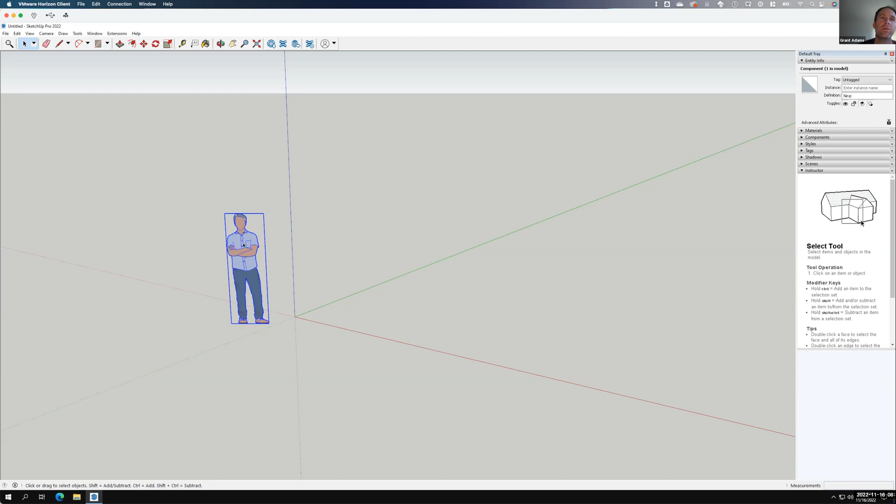SketchUp by default, when you create a brand new file, always puts a little person in for scale. This is classic SketchUp, and each version that SketchUp updates gets new people, so you can tell what version it is by who's standing there. I'm going to go ahead and erase that person because we don't need it - I did that by just right-clicking on it and then choosing erase.

Let me just reorganize here. I need to move my Zoom window over so it's not in the way of what I'm working on. There we go. And so I'd like to walk through the interface, because it's very different than any program we've used thus far.

First off, we have a traditional file menu structure at the very top, followed by a toolbar that contains some very basic tools. Some of them are hidden underneath others. So we've got our regular line tool, and underneath we have a freehand tool. We've got our rectangle tool, but underneath that we've got a few of the other tools that are available, etc.

This is not my favorite toolbar - I actually really like the large tool set. So if you go to the view menu, view and then toolbars, you can check the box for large tool set. That's the one I prefer when I'm working. It has a lot more tools on it, but it's not enabled by default, so you have to enable it, but it just somehow works a little bit easier for me. So I tend to enable that large tool set. There are duplicate tools up top here, but I'm going to go ahead and do that.

On the right side, we have what they call trays - it's kind of like our windows in the Adobe products where we have layers and whatever. They don't call layers, they call them tags, so we'll be working with tags today. There are other things we also will work with over time. We won't work too much with materials, but we will work with components, and we'll definitely work with the styles section. I'll explore a lot of those ideas as we get through the class.

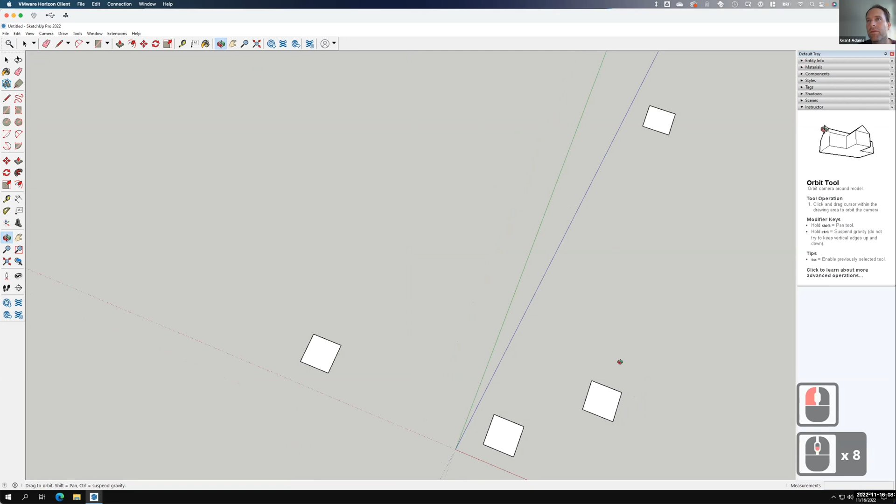If I orbit my view, I can do that by pressing the middle mouse button, the scroll wheel on my mouse, or use the orbit tool right here. If we use the orbit tool and start to look down at them, as we move through different views, we start to see that yes, they all are, in fact, squares. It's just when we're looking at them from an angle we're not seeing them all as squares. I like to point that out early in SketchUp so people aren't confused, because it definitely confuses me at the beginning of working with SketchUp since it just doesn't look quite right. That's how the SketchUp view works, though.

So when you create a shape, I'm going to pull this shape up. I'm using the push-pull tool here, we'll cover this a little bit more in a minute. When you create a shape, by default SketchUp attaches shapes together. Let me do the push-pull on this one as well, and then I'll show you.

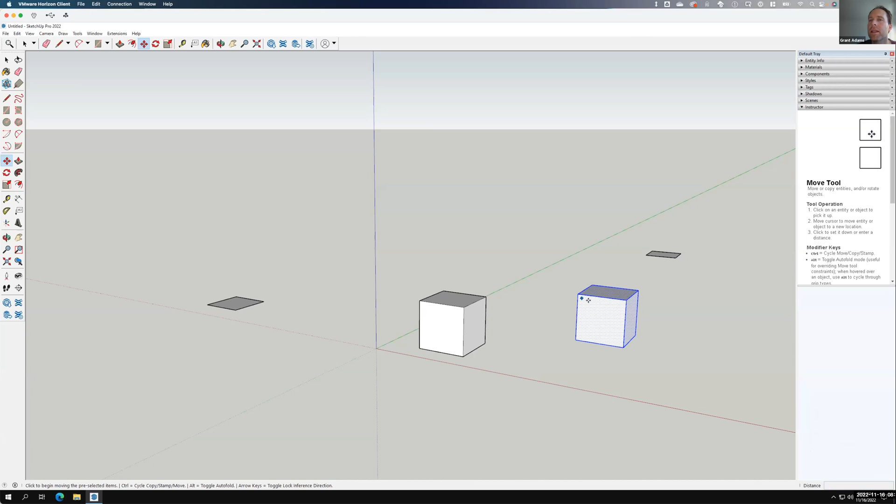This may be review for some of you, but it's worth explaining. If I take this shape here and use the move tool, and move it so these two shapes connect together, as soon as they touch they're now connected. So if I went to move them, they're now attached to each other. One of the strategies, if you don't want your shapes to be attached, is before you move them together, if you want to keep them separate, select the shape, right click on it and say make group.

Likewise, I would take this shape right here, select it, right click and say make group. And now if I take this shape and move it next to that shape, they still snap together, but if I move it again, they would stay separate. I'm a big fan in SketchUp of making groups as you create things, because if you don't, they end up being kind of attached together and get more difficult to work with. So it's part of the strategy of working in SketchUp, kind of grouping objects together.

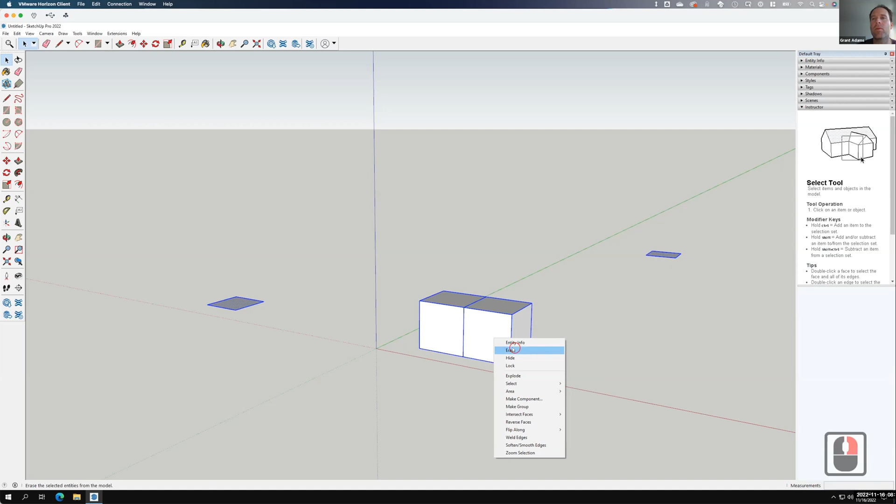So I've selected all of those. I'm going to right click and erase them. And then let's talk about bringing in our AutoCAD.

I have my AutoCAD saved from last class. I can go ahead and bring that AutoCAD in. I'll go to File and then Import, and we'll leave it set for all supported types. I'm going to look in my flash drive, or excuse me, my OneDrive for my building. So let's go here. Let me do, I'm thinking I might do this older one because it has a sloped roof, just so you can see me create the sloped roof. You know, I might not have it.

Bear with me for just a second. We'll use the base drawing here. Let me go ahead and import it.

It's going to bring in the AutoCAD drawing and give us a summary of all the things it brought in. We'll go ahead and say close, and there it is. Now this is where you start to see what garbage got brought in along with your AutoCAD.

It looks like way over here I have an extra copy of my floor plan. Not sure why it's there. Right now, if I try to select it, it comes in as a component.

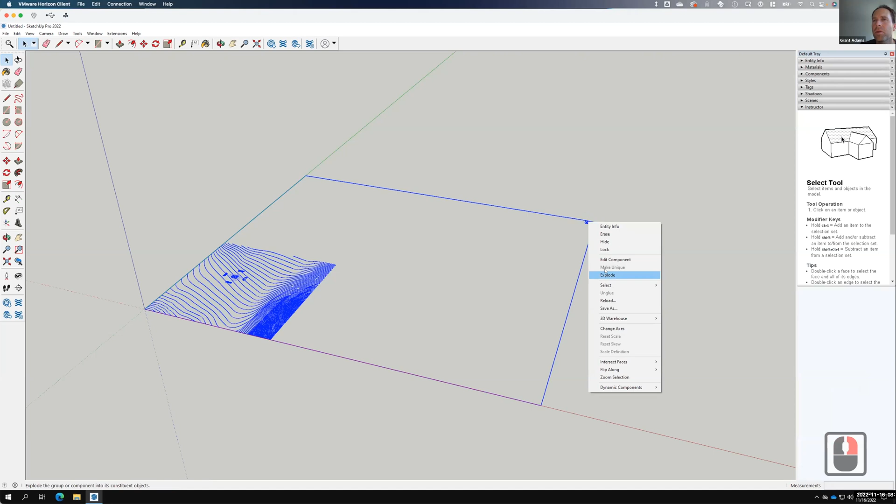I can right click on it and explode it, but that means everything will attach together. I can also click on it and then double click to get inside of it, in which case I can select individual pieces. Now that I'm inside it, I can right click and say erase, and that gets rid of that piece.

What I'm going to do to organize here is go in and start deleting things. Like I said, layers in SketchUp aren't called layers, they're called tags. I'm going to open up the tags on the right-hand side here and start cleaning up my drawing.

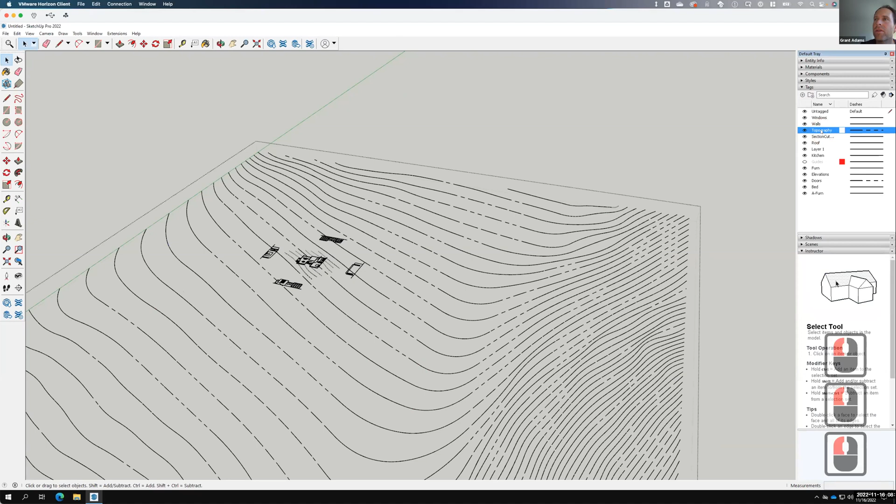First off, the topography, I don't need that. I'm going to right click on it and delete that tag. When I do that, it asks if I want to move the objects to a different layer or delete them. I want to delete them, so I'll say okay.

The idea here is that I'm trying to pare down to just the parts that I need. So as I continue on, I don't need the furniture. Let's right click on that and delete the tag, and again we'll delete all the parts of it.

There they are. Now as we zoom in and look at the floor plan a bit more, there's a lot of things in this floor plan that I just don't need, that I can end up bringing in or deleting a little later on. We can see what's on a various layer by turning those layers on and off.

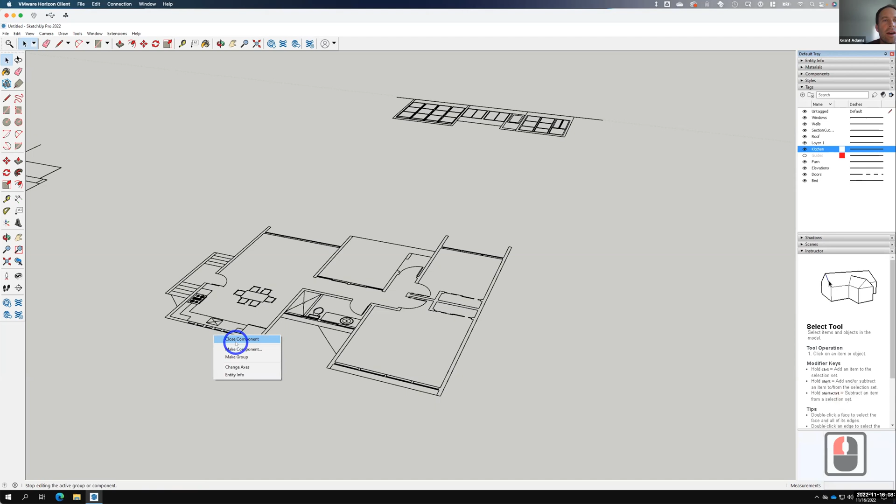This one's a little complicated because on this kitchen layer, I have my windows - they weren't layered correctly - but I also have parts of my kitchen. So I might have to go in and manually delete some parts of this.

So let's go ahead and do that. I'll select them, right click and erase. I could also press the delete key on the keyboard. Now I remember, if you're on a Mac, the delete key won't work via the remote desktop.

Go ahead and just right click to erase on all of these. And now everything that's left is just those windows.

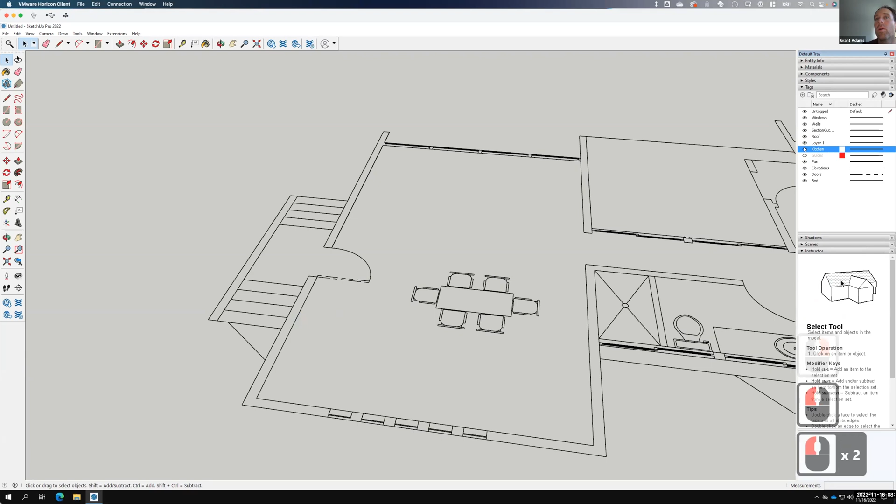I want those to stay. So when I right click to delete this, this is where I'm going to assign it to another tag, and I'll assign it to the walls layer like that. We'll go ahead and say okay. So it got deleted, but now it's on the walls layer.

What I don't need is the roof lines here. I don't need that, so let's go ahead and delete that. We're going to delete the entities.

I'm not even sure what this section cut is. Let's zoom out and make sure that it's not something that I need. Nope, not something that I need. I'm going to right click and delete that tag.

So the cleaner I make this, the better off it's going to be long term. There appears to be nothing on layer 1, so let's go ahead and delete that tag.

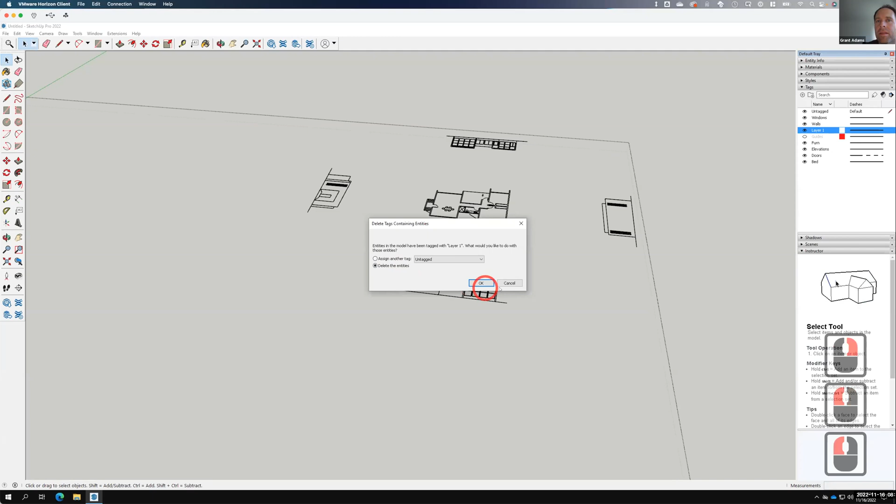Now my windows, that one's kind of an iffy one because I need some parts of the windows. If the frames of the windows are still there, I think we're okay. So I'm going to go ahead and delete the windows - right click and delete the tag.

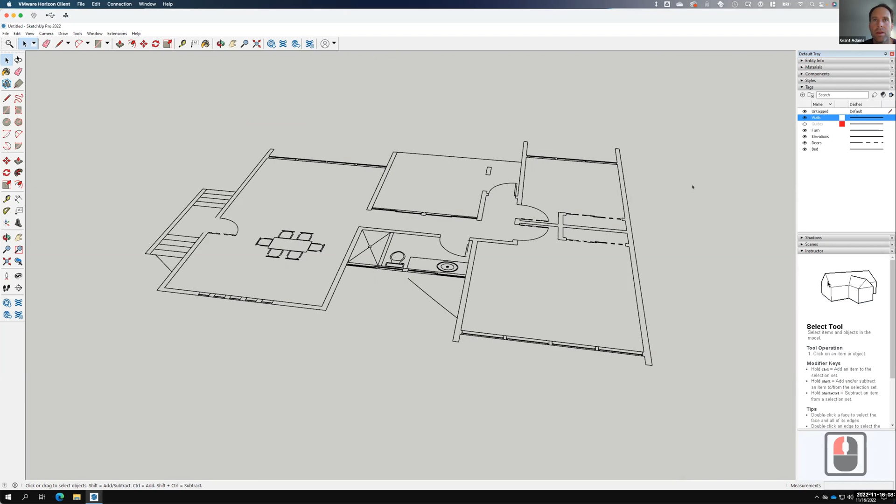Now you don't have to delete them all, but a lot of times... oops, I don't think I deleted them. Let's undo. Ah, there it is, okay. Right click, delete tag - sorry, we need to delete. There we go, and now those have gone away.

You can leave all of these, but they tend to get in the way as you start to build your model. So the more you pare it down, the better off you're going to be, I think.

So we're going to leave the walls, obviously. The guides here, we don't need them - right click and delete that. The furniture, we don't need that - right click, delete tag. Elevations, I'm going to need. Doors, I do not need, so I'll right click and delete that.

How did you select some of the kitchen when you were selecting individually? Okay, so that's fine. If you're outside of the component, when you go to select it, it's going to select the whole thing. If you double click on it, that'll let you get in.

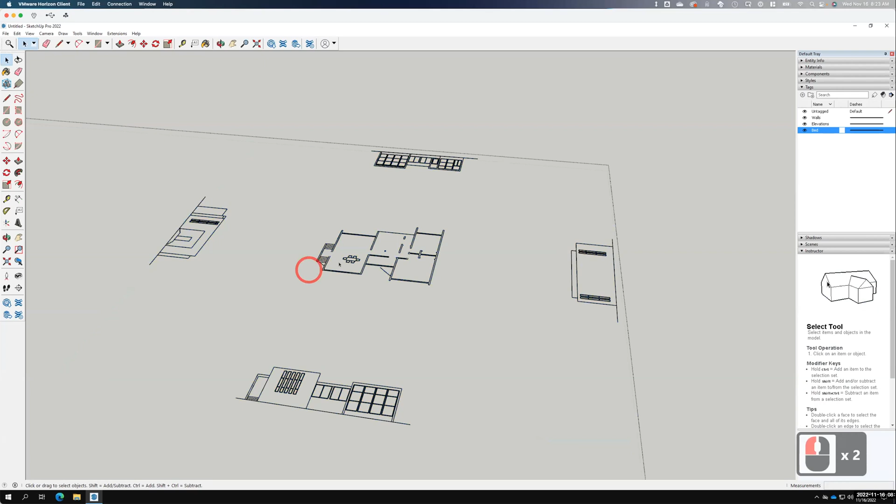For example, I don't want this table here. So now that I'm inside the component, I can just select it and delete it. I'll right click and say erase. And you can see that I'm actually missing a few other little bits of lines as I was starting to clean this up.

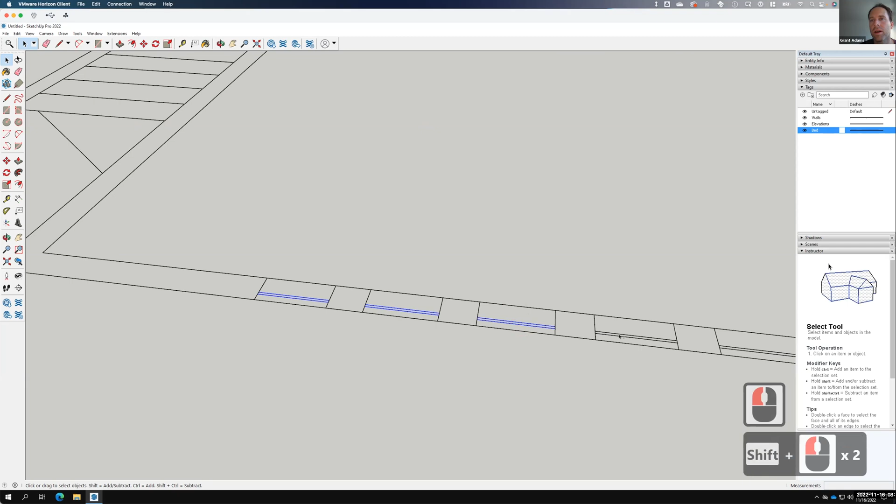Furthermore, I don't need these double lines for these windows, so we'll go ahead and select those and delete those. A lot of times it's easier to work with layers and delete by layer, but other times you just need to go in and manually delete some things, like that little extra line that was obviously on an incorrect layer, so we'll go in and select it.

Selecting, by the way, works the same way as AutoCAD. Selection from left to right is only what's fully contained. From right to left is everything that's inside, everything that it touches. So the selections are similar in that case.

The bed layer here, we don't need that. And so we have the elevations. We have something called untagged. It won't let me delete it because I need a new tag. I'm going to create a new tag, so I clicked on that little plus sign and I'm going to call this 3D.

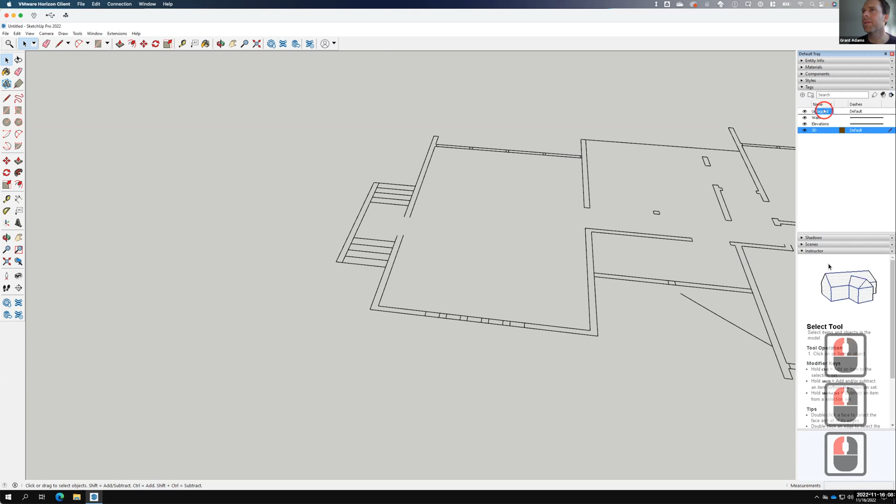And then I can right click and delete this one. Oh, let me make this one current. Sorry, now I'll be able to delete it. No... well, it doesn't appear that I'm going to be able to delete that.

Okay, that's all right. So what I end up with is the elevation views and the walls. At this point, oh, looks like I do need to get rid of that line there.

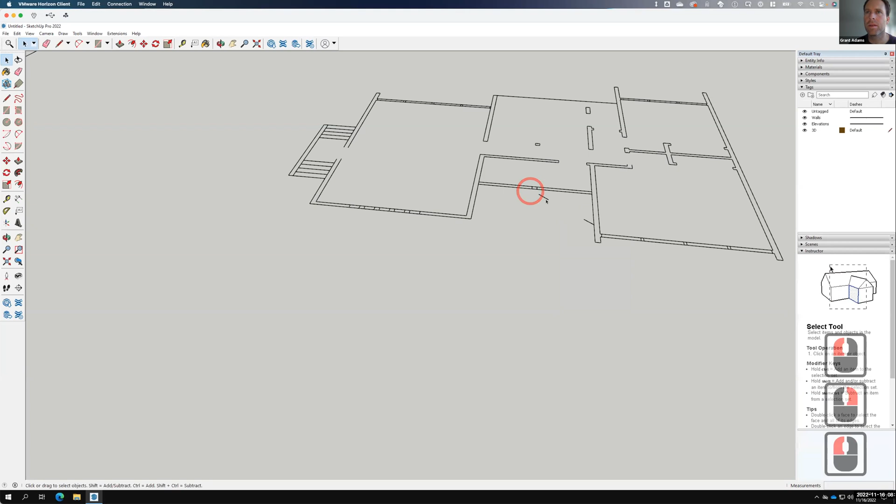Perfect. Okay, so now at this point, I can get out of the component, but I'm going to go ahead and break this component up so that I can make individual groups of each one of these pieces. So I'm going to right click on the whole thing and go to explode, and when I do that, it breaks these all into just regular lines.

But what I can do is select each one of the elevation views, right click and say either make component or make group. I tend to choose a group, but if you'd prefer to make a component, you can. Components are slightly different than groups in how they're treated, but for our purposes right now, it makes no difference which one you choose.

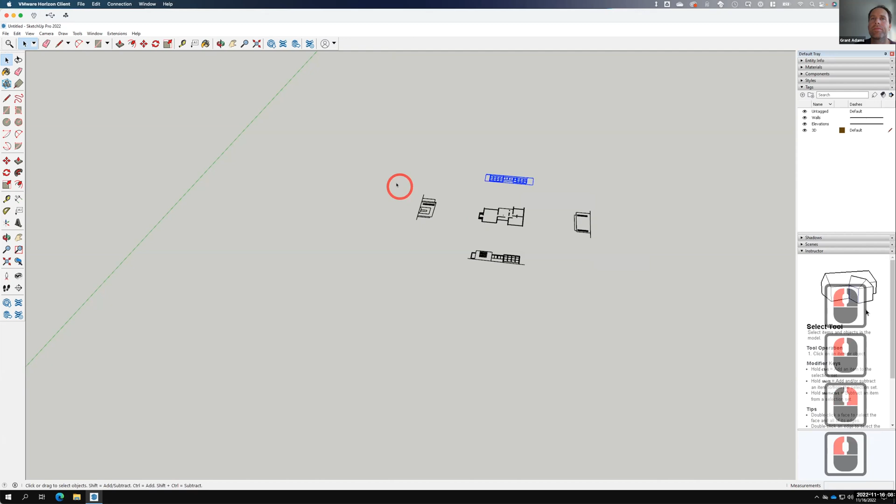I'm going to go ahead and stick with a group. I'll right click on this one and say make group. I'll right click on this one and say make group. Just like I was talking about earlier in lecture, by making these groups, I'm causing these not to attach to anything else, so they're all separate objects.

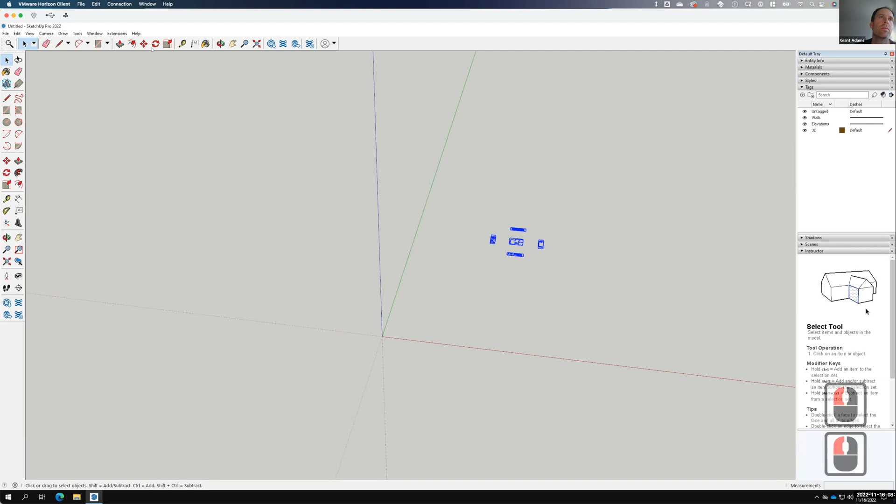Let's go ahead and move those closer to the axes over here. I'm going to go ahead and with them all selected, I'll use the move tool, and I'll go ahead and move these closer to the axes like that.

All right, so now that I have all of those pieces, let's think about how they are lining up. First off, I can take these elevation views and actually stand them up and use them as kind of references for my building. So how would I go about standing them up?

Well, there is a rotate tool in SketchUp right here, but it's very difficult to rotate without a three-dimensional object to rotate off of. So what I actually recommend doing is creating a little box right at the floor line. So my floor is right here. I'll create a little box like that, and use the push-pull tool here to bring it up in 3D.

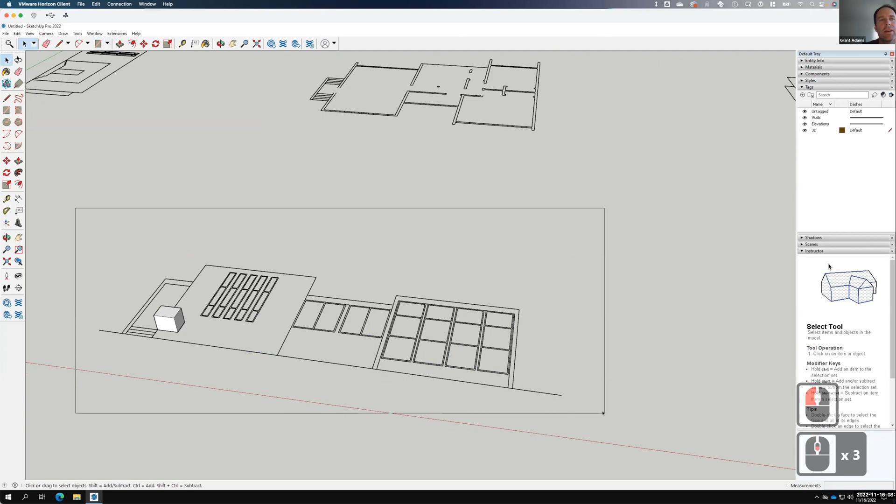Now, the dimensions of this don't matter, but once I have that box on my view, I can use it by selecting it and my elevation view with the rotate tool to rotate in that plane. So rather than just rotating around in the flat plane, as I move to this face, I can get the rotation tool to turn out to be the red protractor right there. And of course, it doesn't want to do it the way I want it to.

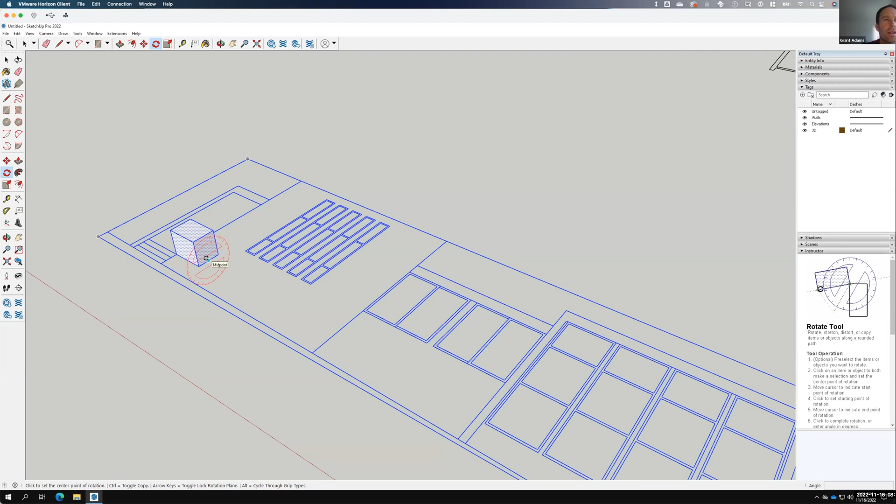Try it, sometimes you just have to fuss with it a little bit. We'll go ahead and do it from the midpoint here instead, so I'll click, and this is the point around which I want to rotate, and I can fold that point straight up. Now we know that I was a little bit low when I did that because I moved it from the midpoint, so I will move it vertically.

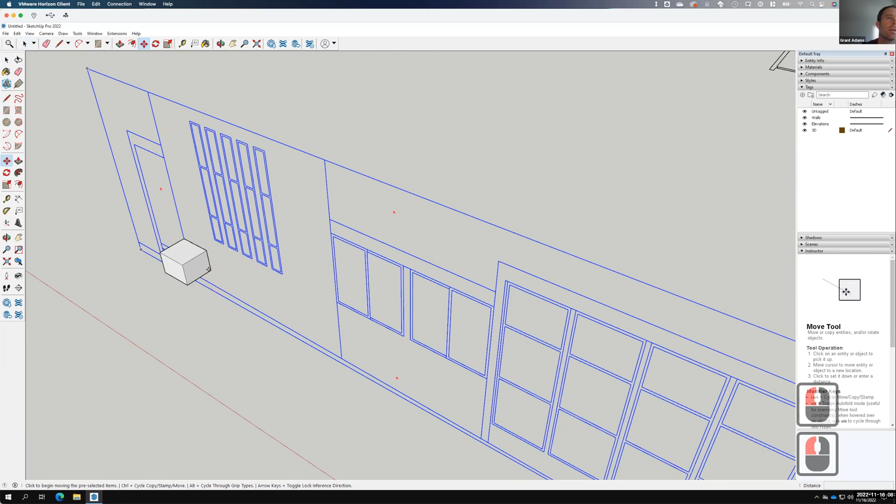Now, the elevation, not my little box, and we will go ahead and move just the elevation from there up to the midpoint there. The only reason I care is because I want my floor plan right here to match up. If I came straight across, you can see that the line turns green when I do that, it should be green and it should come over and meet that point there, which is my finished floor height. So I just want to confirm that's doing what it's supposed to at the correct height.

Once that's done, I can go ahead and erase this little box, and I can also erase this line that kind of ties it together. There it is. So let's do the same thing over here with this view.

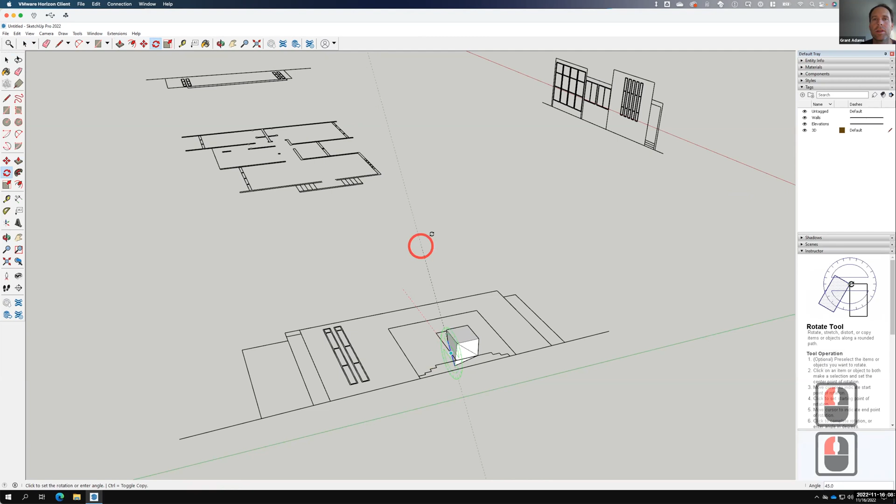So once again, I'll create a box, and then I'll use the push-pull tool to make it three-dimensional. Then I'll use my rotate tool. Right there, and we're going to rotate this up. Oops, helps if I select it first. Sorry, there we go. Now we use my rotate tool.

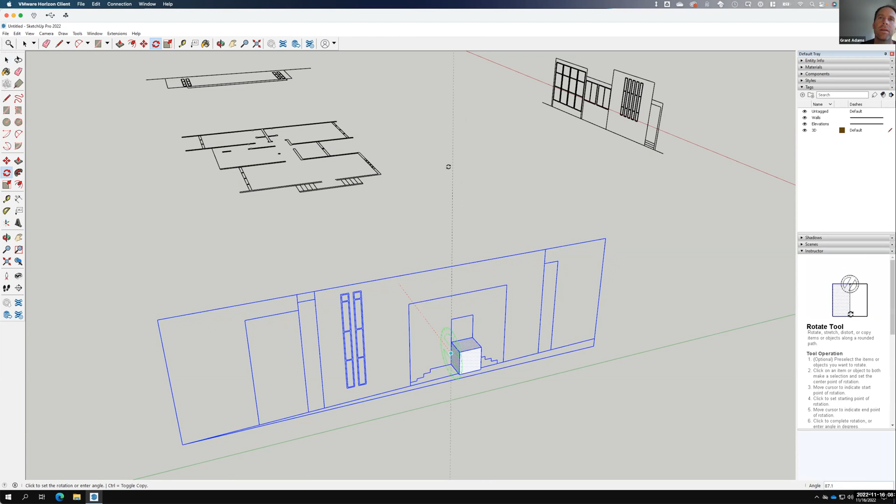And we're going to rotate that so that it's up. And you can actually see it kind of snap, it'll snap to a blue line right there, and that way it's standing up correctly.

Now, likewise, I have to make sure that this lines up. So if I came from my floor plan over here across as red, that's where it's supposed to be, and it's currently too low. So I could go ahead and move. Oops, they're attached, sorry, I need to move just this piece. We'll go to move, and there it is. That's lined up. Then we'll continue.

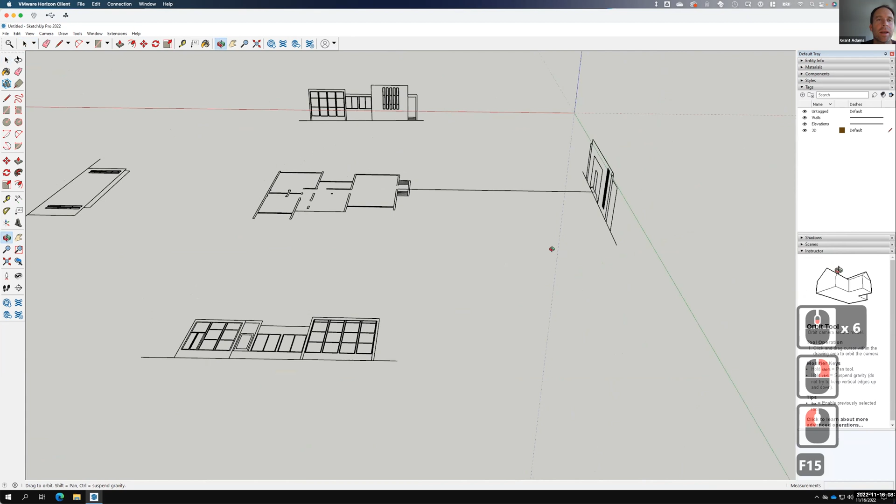I can go ahead and erase that box, and we'll orbit. Oops, sorry, I'm going to do that several times. Rhino is right click to orbit, and I get lost and forget that I'm in SketchUp, not Rhino.

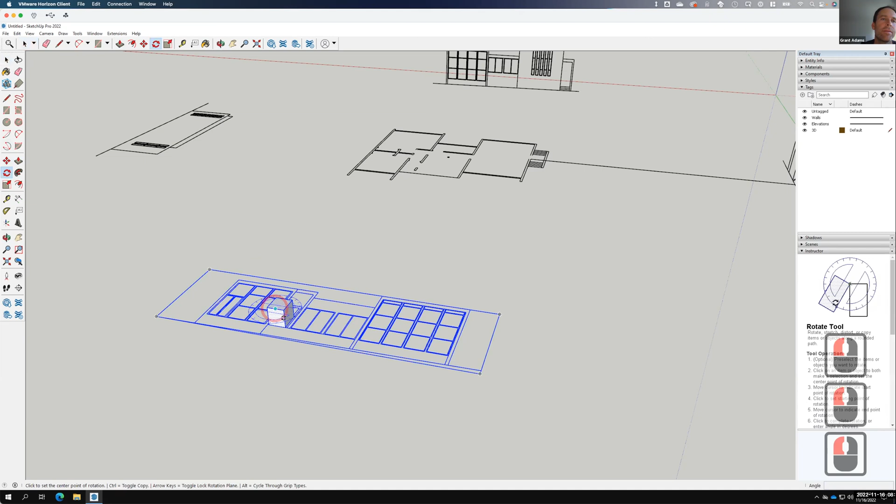All right, and then we'll do another one here, and I'll again use the push-pull tool to make it a little bit more three-dimensional. And then we'll select all of it, and we'll go ahead and rotate again until it's standing up.

We need to confirm that it's at the correct height, so we'll go from right here, come over right along the green axis. There it is, and that is a little bit high, so I'm going to take this and we're going to move it down. Like that. Then we can delete that box.

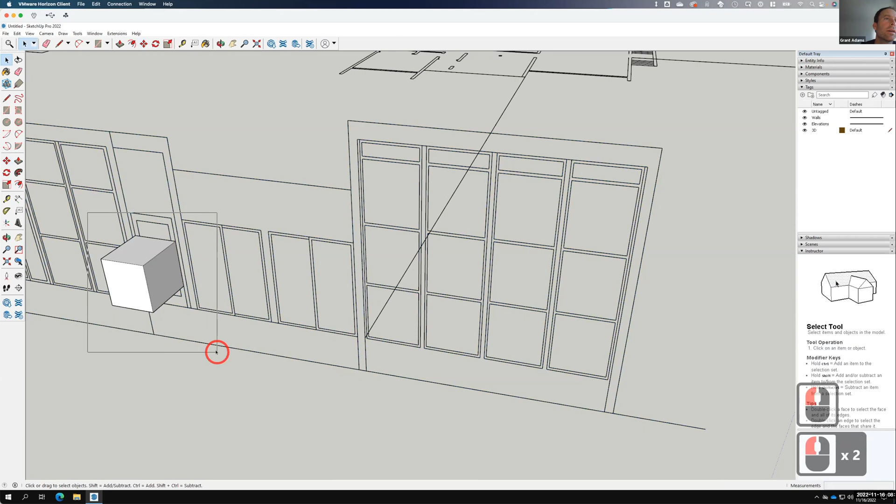We don't need it, right click and erase. We don't need that line either, we actually don't need this line either. And I'll orbit, and you can see where I'm going with this. We'll have one more to do here.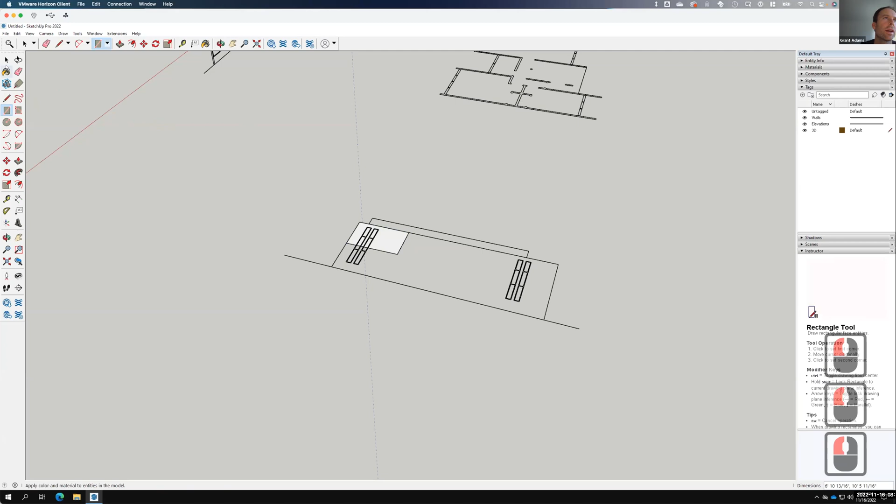This one I have no way of judging where it is, so I'm just creating a quick box, and we'll then move it after the fact. So let's go like that, take the whole thing, and rotate it. There it is.

And this one is really hard to judge where the height is because I have no real base on where the floor is. So what I'm going to do is I'll pull the height over from here along that red axis, like that. And then I can take this whole thing and move it.

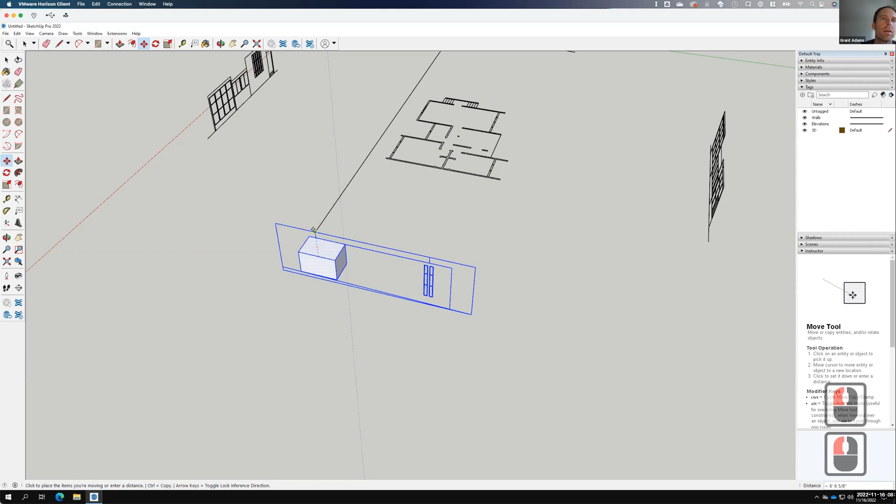I didn't quite get it all, let's go to move, and we'll go from that corner till we meet it there. And so now that I've done this, I have all of my views set up, and these are going to help me build out my 3D model.

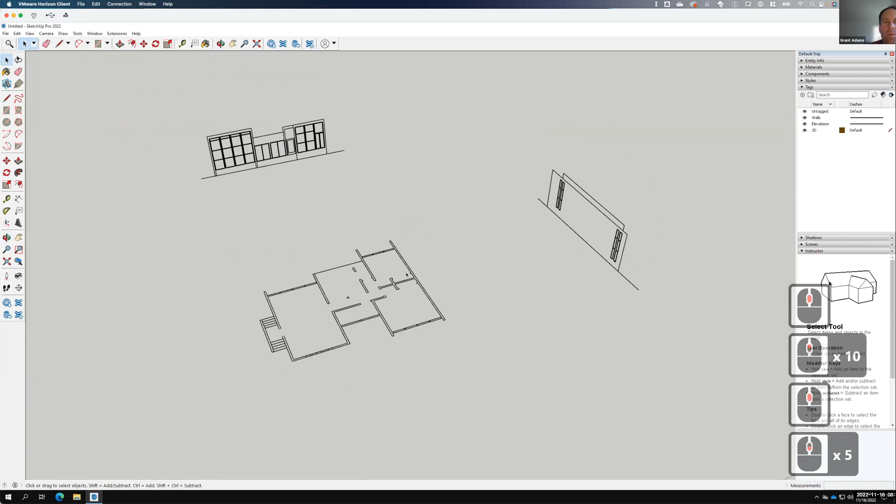Okay, so first thing I need to do is start thinking about the floor plans. So we'll come in here and I have a couple options. First thing I can do is I can go ahead with a rectangle and just draw a big rectangle that essentially covers my whole building. So we want it to be big enough to cover the whole building.

There it is. And what some people do is they'll go ahead and at this point explode the floor plan that they created, and this should divide up that rectangle. If it does, that's great, and it saves you a bunch of steps. If it doesn't, you may be stuck tracing over your building using the line tool.

I'm going to go ahead and try the explode technique. So at this point, I'll select my floor plan, right click and say explode, and we'll see if it's done it. Okay, it did do some of it.

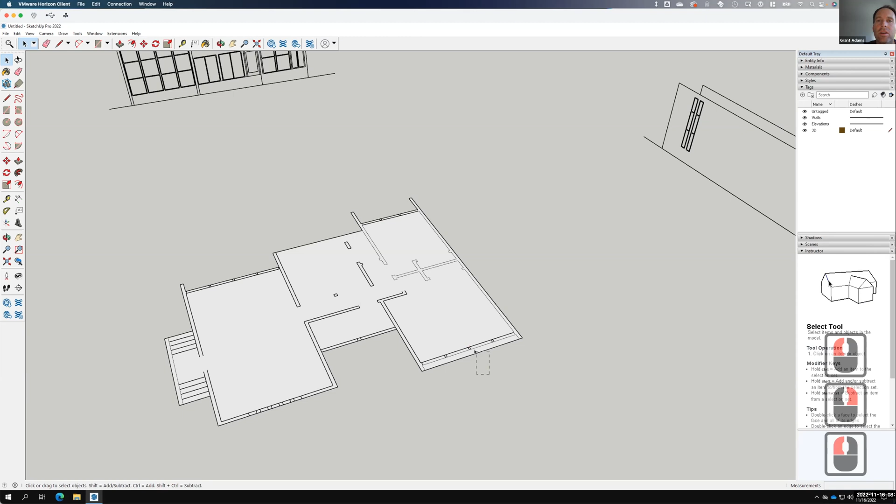At this point, I could delete the parts that I don't want. Outside here, we don't need that piece, so I can right click and erase. We can get rid of these two lines, right click and erase. I can get rid of that section, right click and erase, and get rid of this section. I can right click and erase, and get rid of that section right there. I'll right click and erase there.

So in here, it has divided up a lot of the walls, but here, for example, it hasn't divided because I don't have a line that goes across. So I'll have to come back with my line tool and draw a line that goes across, and that separates

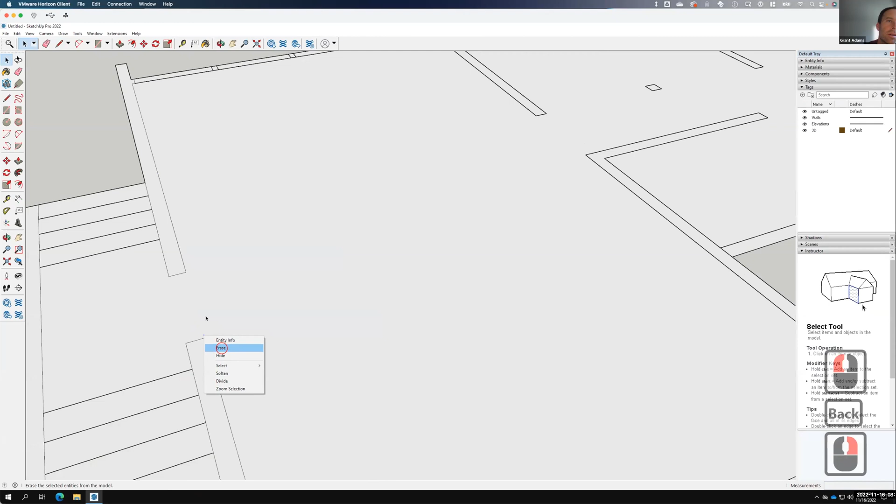some of these shapes. So let's see, that's now separate. That line is a little bit extra. Let's go ahead and delete that piece like that. This is separate.

Looks like it did trace some of it. It looks like I have to close that one off, so we'll come over here and close this one off. And that then separated that from this.

That's not quite separate, and this is just one of those you have to work your way through. You may have to come in and do some extra tracing. So let me trace over that section, let me trace over this, I'll trace over this. All right, we'll trace over that section right there.

So, like I said, this is just part of SketchUp. Sometimes you have to do a little bit of extra tracing like that. Sometimes you could use the rectangle tool and just draw right over the top. Sometimes that'll work. And we'll keep working our way through.

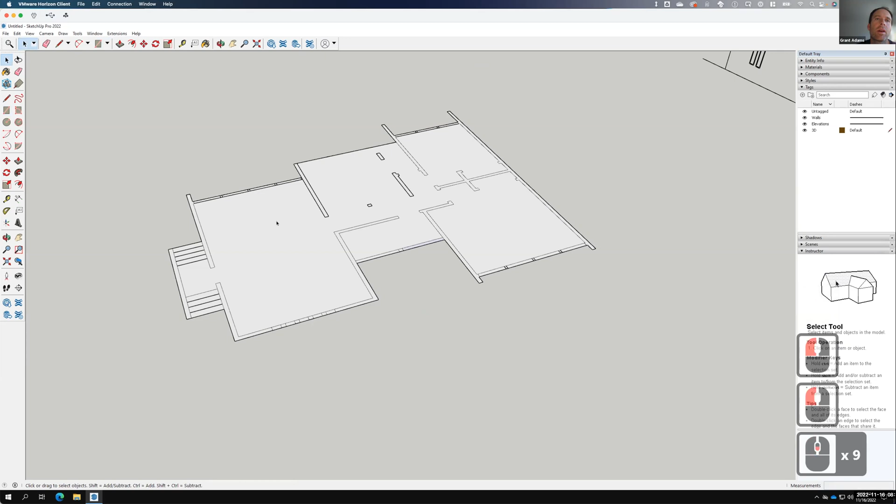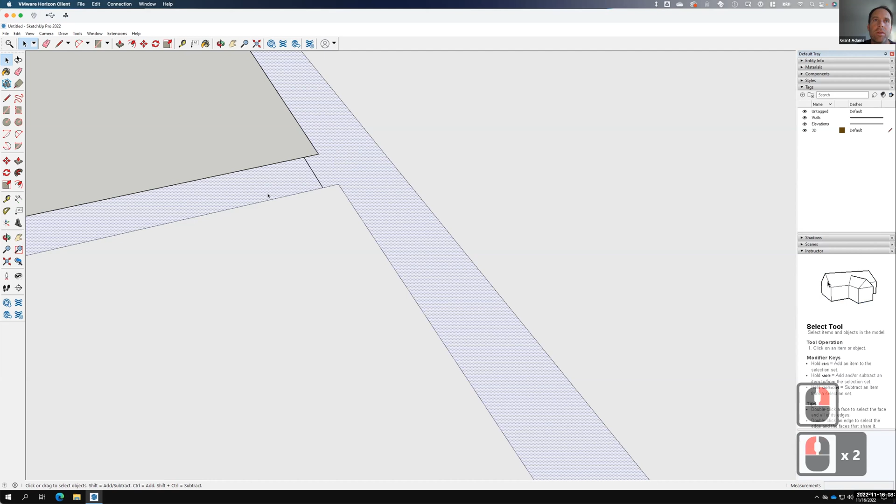Looks like this one hasn't quite been separated out yet, so let's trace it. And sometimes that's all it takes. The way SketchUp works is that this surface is separate from that surface because of that line. So if I were to delete this line segment right here,

this surface is now continuous with that surface. I still need to add these lines. Now that one's separate, that one's separate. And let me confirm those are all separate. That one's not yet. There we go. A few more in here - we've got this little post.

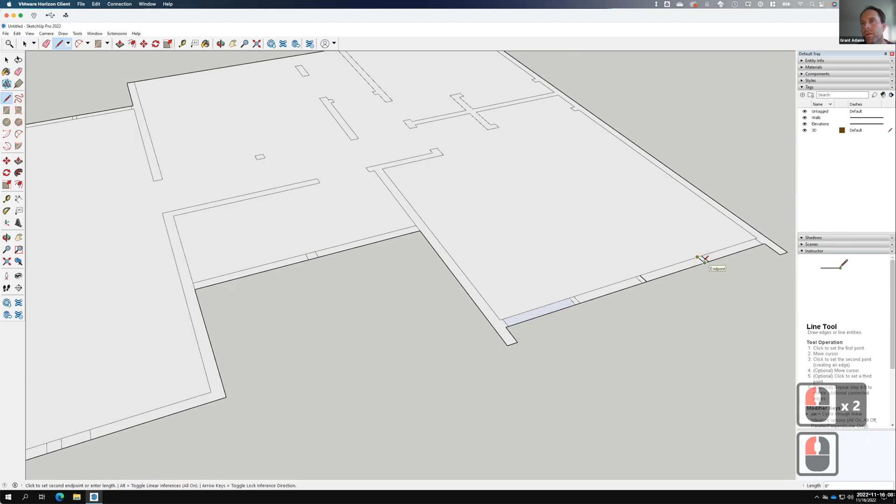Sometimes all it takes is retracing one line to get them to separate out. This looks pretty good so far. That section still needs a little bit of attention. And we can confirm, yes, those are all little separate pieces. A little bit more attention up here. I think that probably did it.

Perfect. So now that I have all of those separate, I can start to use that push-pull tool we talked about earlier to build up these walls. We can see over here that this building has a height equivalent to that. So if I use the push-pull tool on, say, this little wall, I can pull it up till it matches up with that height right there. Likewise, I can take this wall here and pull it up till it matches that height. So I'm using this as a reference.

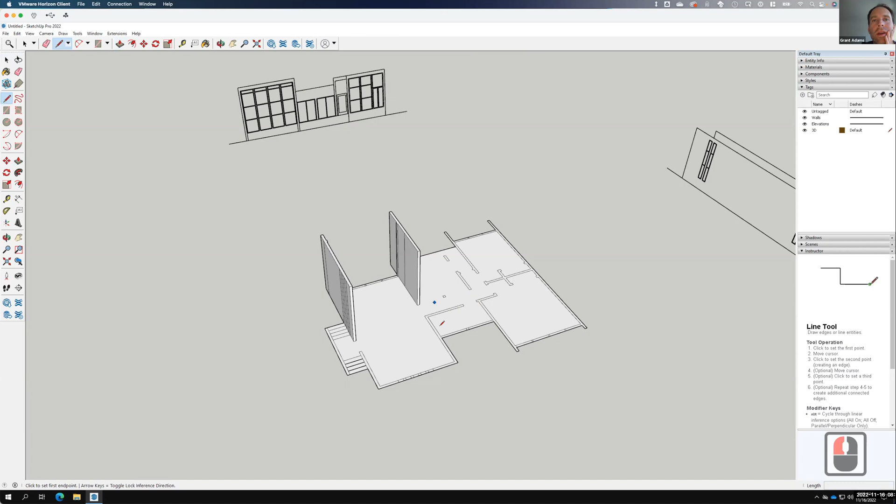Also, this piece of the wall is shorter, therefore I should separate those two. So I'll draw a line that goes across right there so that I can pull this separate from that piece there.

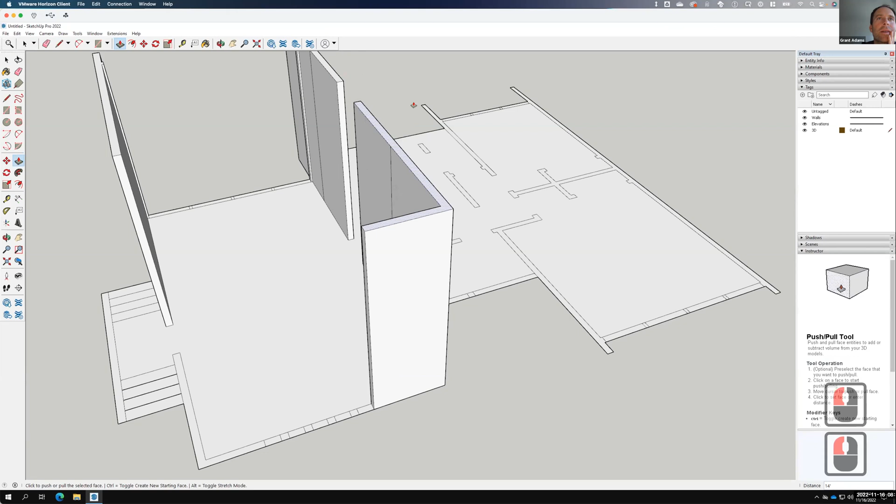So we'll go ahead and use the push-pull tool and pull this one up. And again, we're just snapping to our other pieces. We can use the push-pull, and there we go, pull this one up to right there. And then obviously these are all little windows.

So we'll take these surfaces. I'm going to hold down Shift and select all of them at once, and we'll use the push-pull. Nope, it's not going to let me do it all at once. Sometimes SketchUp has these kinds of little quirks, so I'll have to do them all separate, like that, like that.

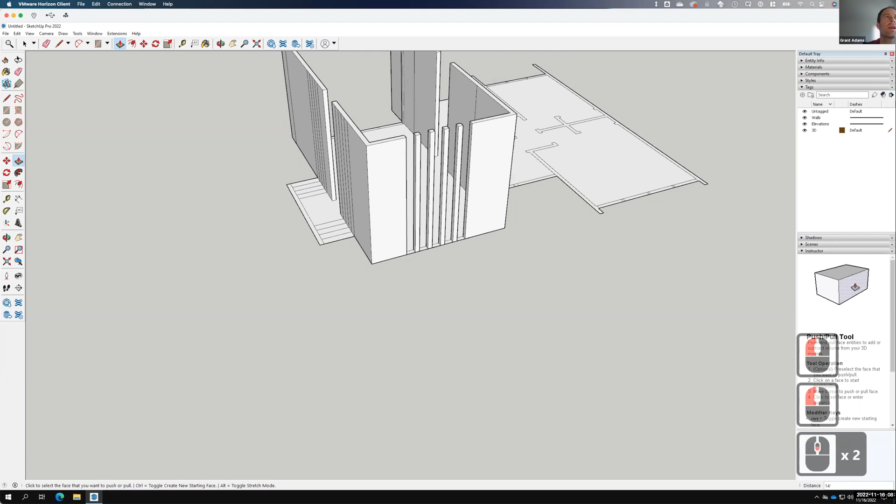And like that. So I was able to create that first set of walls based on my lines. Now there are extra lines - you saw that it pulled up all these individual divisions. I don't need all of those. I could go back and delete them, right click and erase each of those, and make this back into a continuous

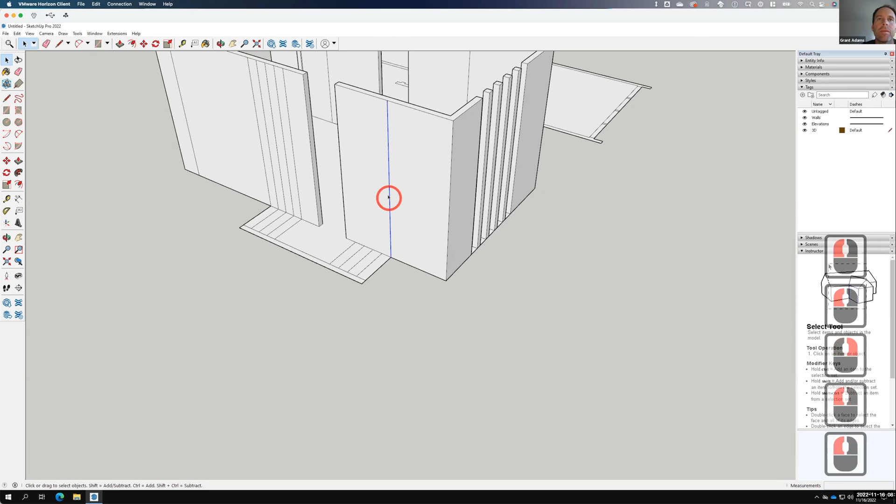wall like that. Now, what about when I have something like these windows on the end and they're not full height? Well, I need to know how big they are, so that's where these come in. I know that my base of the window would start from right here. And if I click on that corner and come over again and it stays green, I can snap to that edge. That right there is the bottom of my windows, so I could then draw straight across and that fills in that part.

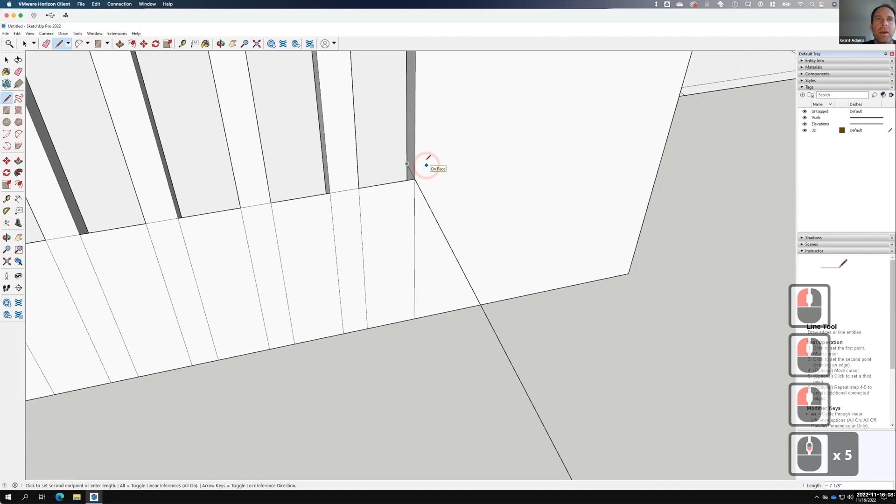I could come in here, draw straight across to right there, and then draw from here to right there. And we're starting to fill this in to right there. See how I'm starting to build that out. Now I can look at where the top of the window would be, right here.

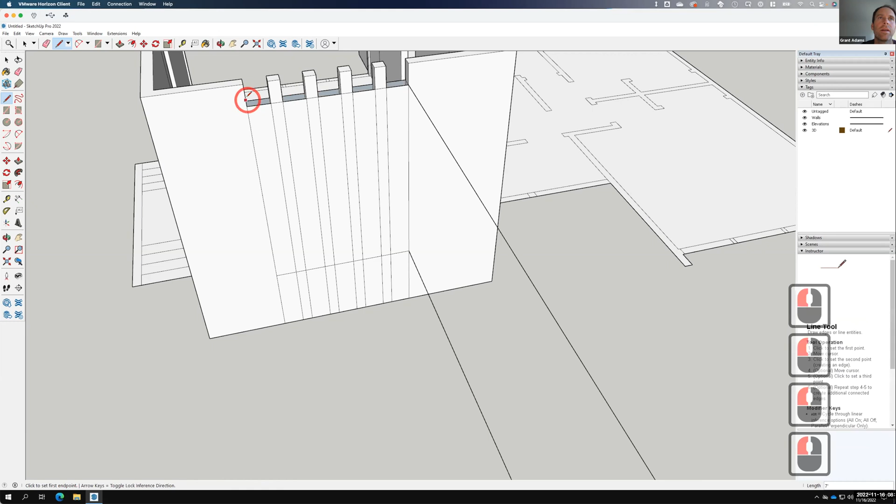So we're using our AutoCAD to our advantage here because we've already spent time developing this. So there, and there. I have to go from here to here. That fills that in, and then obviously we could fill in the top.

Right there, like that. Once I have this, then I can go in and I can start to clean it up. So we can obviously delete these two lines, we don't need those. We can erase those, and then we can clean up these other lines.

So I could take these lines here. I'm just holding down Shift as I select them. I'll right click and say erase. I'll do the same thing along the top.

I'll right click and I'll say erase. I'll right click and I'll say erase. Now, these obviously would separate out my windows. Like that. I'll right click and I'll say erase. And so that is roughly the window outline.

I would have to do some cleanup on the inside here. If I orbit around here, you can see that the inside hasn't been cleaned up yet either. But as I start to do that and I see that from the outside, at this point, I can embellish these windows if I wanted to. Now, again, this is not a requirement. Minimum, we just want to get the windows.

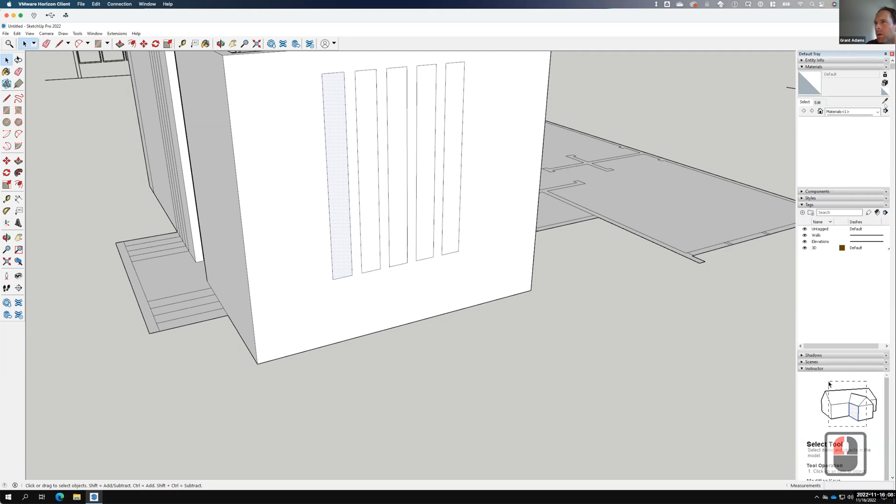First thing I could do is make this surface a different material just so that we could see it as a window. So for example, I could go over here to materials and add, let's look for glass. And so I could take this and apply it to those, just so we can kind of see that they would be glass.

I can also embellish this a bit more. I could use the push-pull and actually push this surface back just a little bit. So I could say, let's go back by an inch. And then there's a little bit of a reveal there. Or we could say 1 inch.

That was, sorry, not correct. 1 inch, not 1 foot. 1 inch. 1 inch, and 1 inch. Just to kind of give a little bit there.

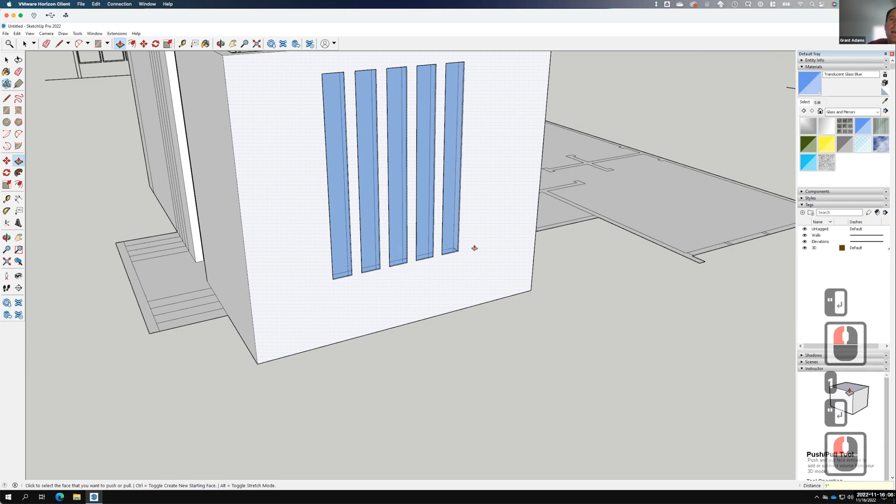The other thing that I could do if I wanted to is use the offset tool, which is right here. Oh, excuse me, there, that one. And I could, on this surface, give a frame of, say, 1.5 inches, like that. And then I could actually change the material of that frame.

So I could go back, sorry, to my materials here. And we could change it back to, you know, wood, for example. And I could make the frame of the window wood if I wanted to. So you're just seeing how this kind of develops.

When we do our exports, we're not going to be using any of the materials. The materials are just here for your own benefit, just to help you see what's going on in a particular building.

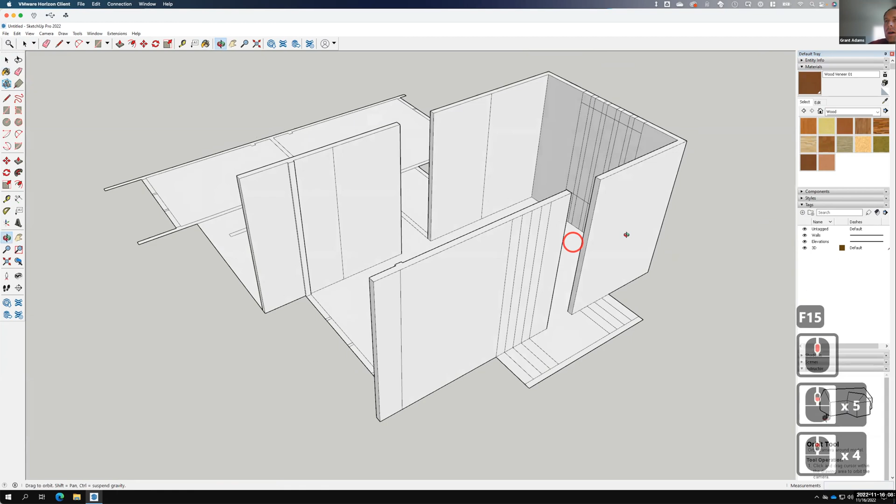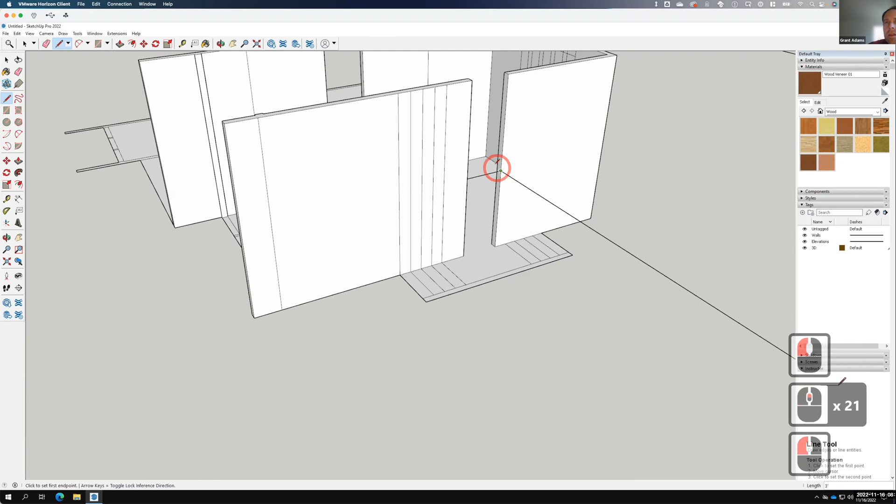When it comes to something like the front door, right, I have it kind of drawn. There's the height. So all I would need to do is pull this height right here over to where that front door would go. And then we can draw over to there, and then we can draw over to there, and then we get that surface.

I could also at this point use the push-pull, and I could take that surface, oops, there it is. And we can use push-pull, and I could pull that up to where it matches up with the building. Again, I could come in and delete those extra lines. I could take that line away, and I could take that line away as well.

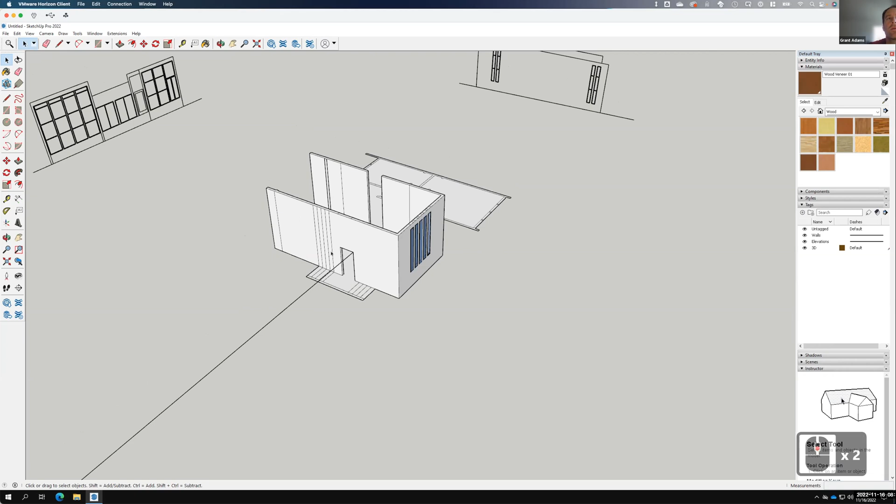Now, sometimes you'll run across a line, and I haven't done this yet, where when you delete it, it deletes part of the surface. In that scenario, if you delete it and it deletes part of the surface, go ahead and just leave that line in place. It's not the end of the world. It's definitely something that we can repair afterwards in Photoshop. So I'm going to go ahead and delete this. And then I need to pull up this little chunk of wall right here.

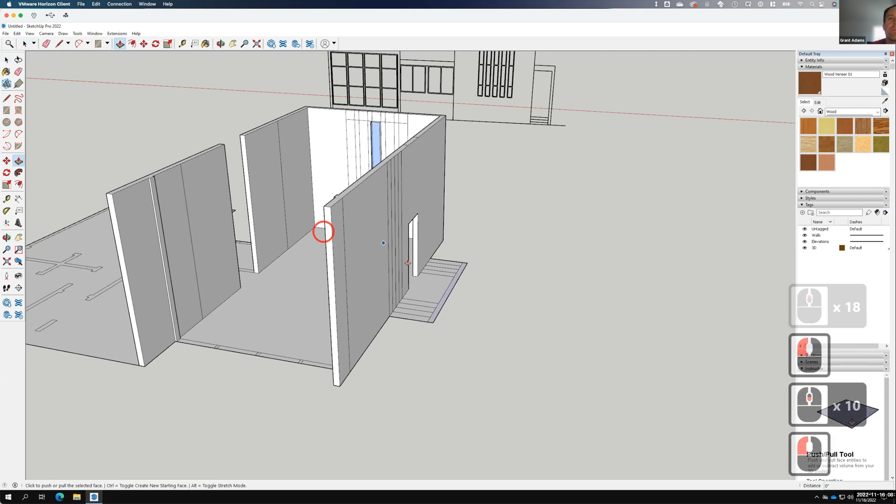We'll use the push-pull tool to pull it up like that. Now, in my building, I ended up with a flat roof across the top, which makes it pretty easy. It's just a matter of connecting lines together to create that part of the roof.

If you want, you can finish all the walls first and group them together before starting the roof. I'd actually recommend doing that, because once you start working on the roof, it's likely to start attaching to the walls, making it harder to work with. So think about doing that.

I did do the roof here, so I'll go ahead and do it. I'm going to come over right like that. After creating it, I need to delete this surface, or maybe better, draw the height of this surface. We'll have that come over right like that, then delete just that part of the surface.

The push-pull tool works in multiple directions, so I can still use it right here. I could push that... oh come on, it's sticking to my other little lines there. Let me undo this. In this scenario, it's probably better to just draw it.

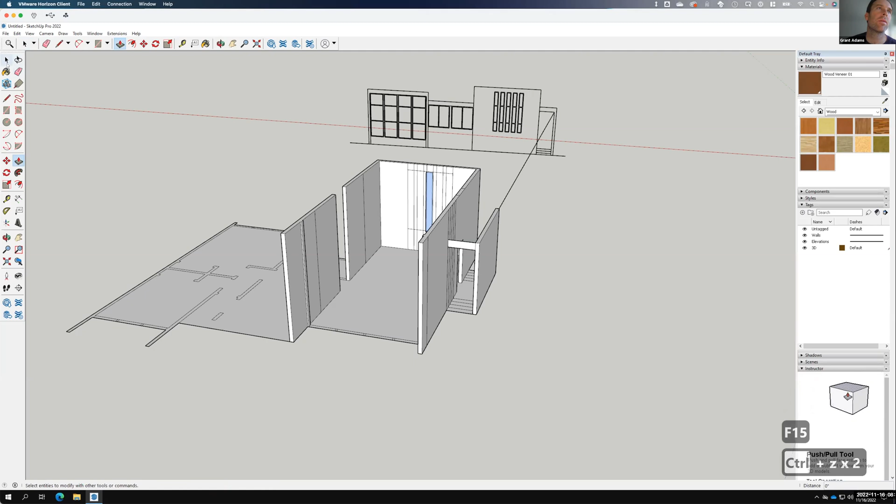So we'll come over here, and we'll come right to there. That draws that. We need to get underneath right in here, and let's see where that would go. Actually, it's probably easier to do this from the outside.

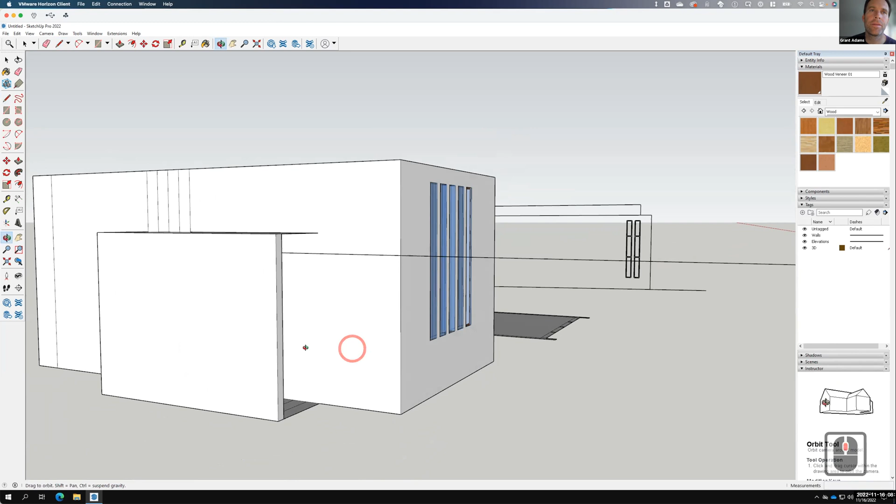And then we need to fill this part in from here all the way back to right there, and that part fills in. So as I've done before, now it's a matter of deleting and cleaning up. We'll clean up that piece, and then we could erase all of these little pieces along the top there, and this little piece on the side.

This was all set at the floor height, so this is where the floor was. The stairs should actually be going down from here, so we may need to do some modifications of these surfaces.

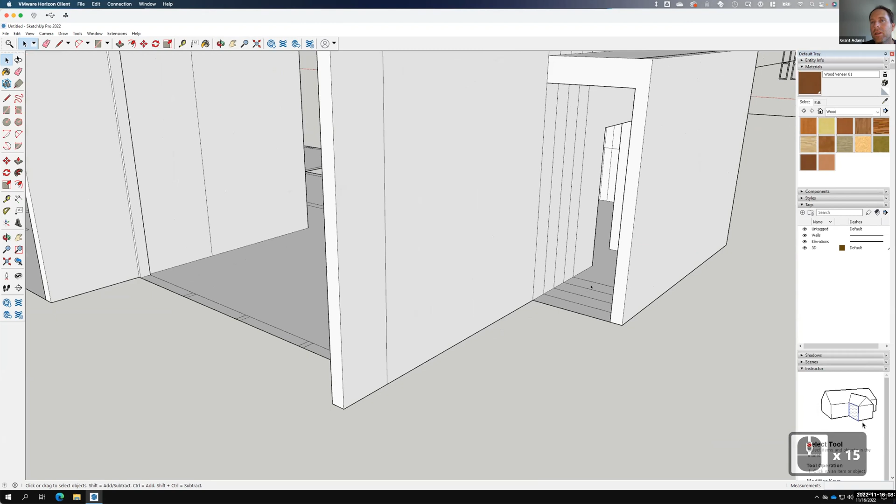So I might do the push-pull and push this down by a certain amount, let's say 6 inches. This one might go down by... I have to do 6 inches first, it's just limiting how much I can do. This one can then go down another 6 inches, as can this one, and this one.

We could then delete this front and delete that extra line. You can see I'm working my way through, so let's go down each one of these. It's another foot, so this would go down 12 inches, and this would go down 6 inches.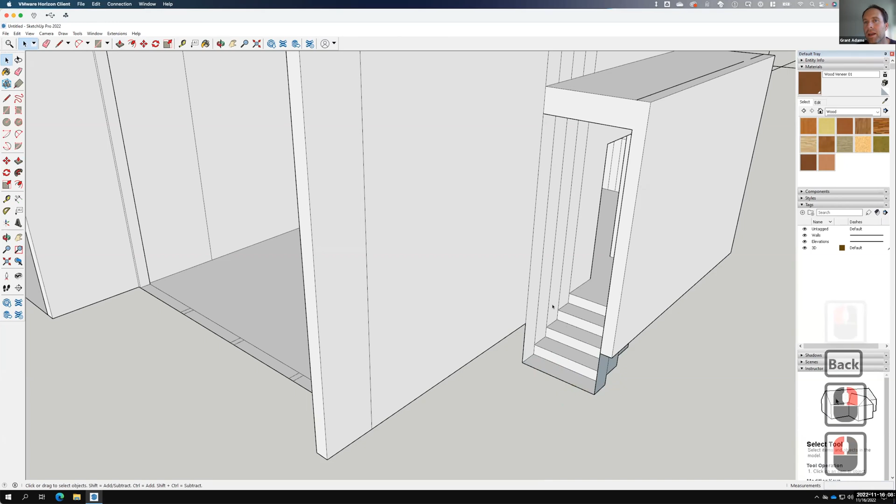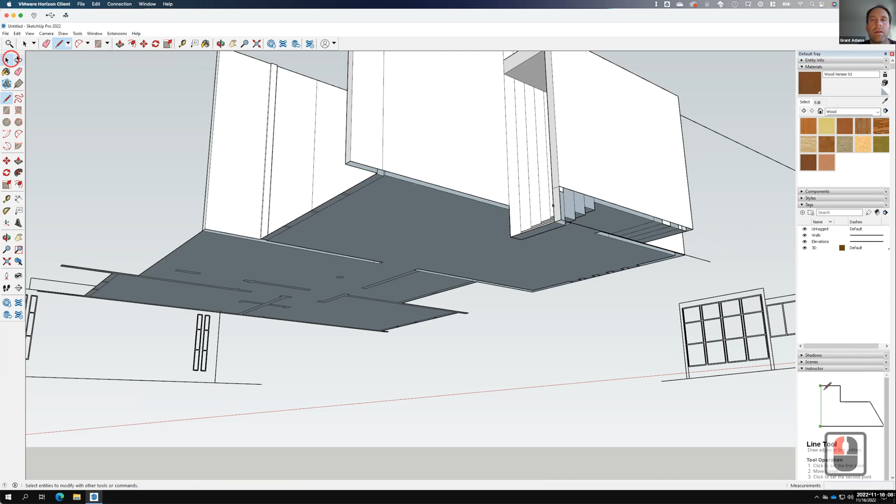You can see I'm starting to build out the stairs going down here like that, but I would need at this point to fill in this wall coming down. So we could draw this the rest of the way down, like that. We could come back and draw that part down, like that, and then fill that part in.

So we could then delete this, and we could delete this as well. And that just built up the side.

Now, if I had it where it was, I really should find the one with the sloping roof. If I had it with the sloping roof, it's just a matter of connecting the dots on the sloping roof. For example, if I had a sloping roof on this elevation—bear with me, because this is not going to be the prettiest elevation in the world.

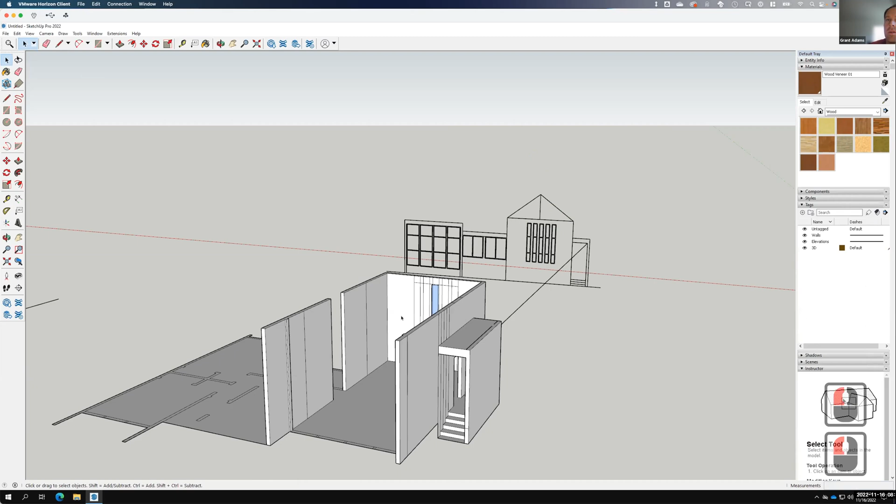But let's say that I had drawn a sloping roof on this. It's a matter of just transferring that information over to this model here. So like I said, if you're going to do the roof, I suggest making a group or a component out of the floor plan. I'm going to make a component in this case, since it'll make my life easier. We'll call this floor plan. There we go. Then I'll start working on the roof.

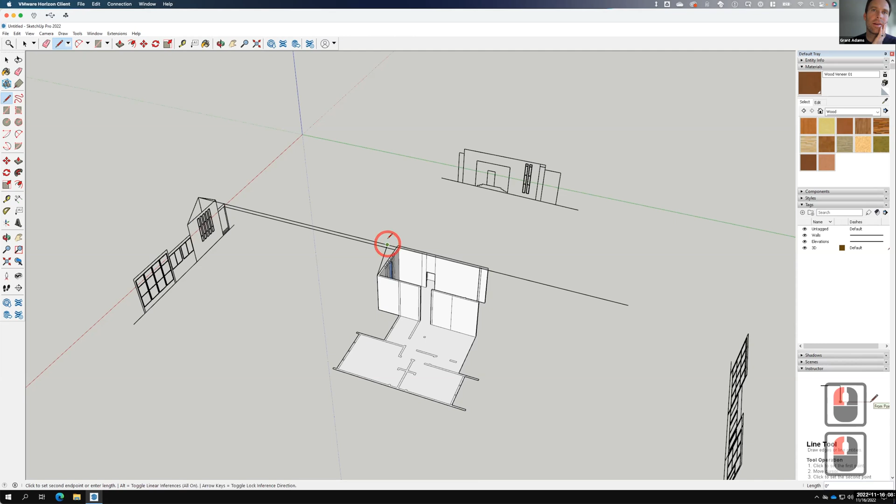So I would go ahead and pull a line across like this. We already know it was lining up with my eaves, so I'd come up to right there and go down to right there. This end is a little trickier because it's on a diagonal, so I'd come up to right there and come down to right there.

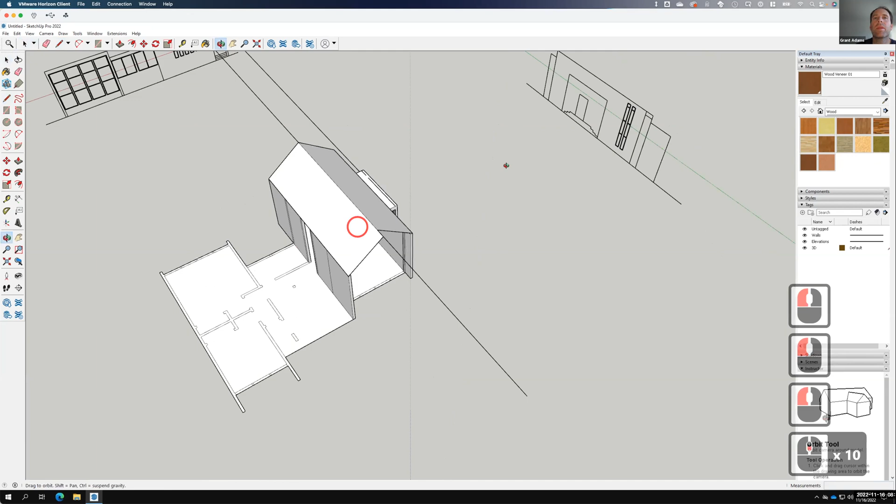You then trace it and draw that part of it. That's going to give me the first slope, and that's going to give me the second slope. You can see I'm starting to build up that line there. These pieces can ultimately be deleted, so we can erase those and erase this.

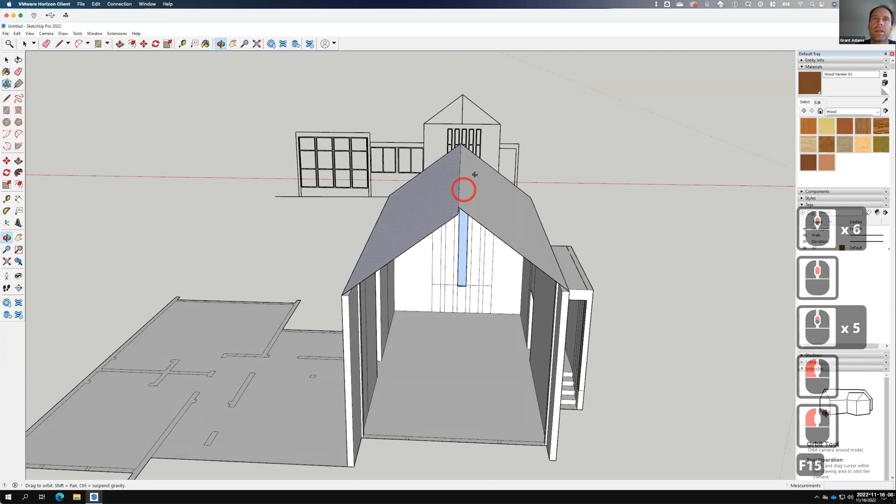You can see that by keeping these as separate pieces, I'm helping myself out. Now I can continue to work with these. I can use the push-pull to add some thickness to it, going either this way or this way, depending.

So let's go down maybe by 12 inches. I could take this one and go down this way by 12 inches. Looks like it's a little bit past where I need to go right there.

So I might figure out where that point is, and then maybe we'll come back with the push-pull and adjust it. Really, a lot of SketchUp is that push-pull.

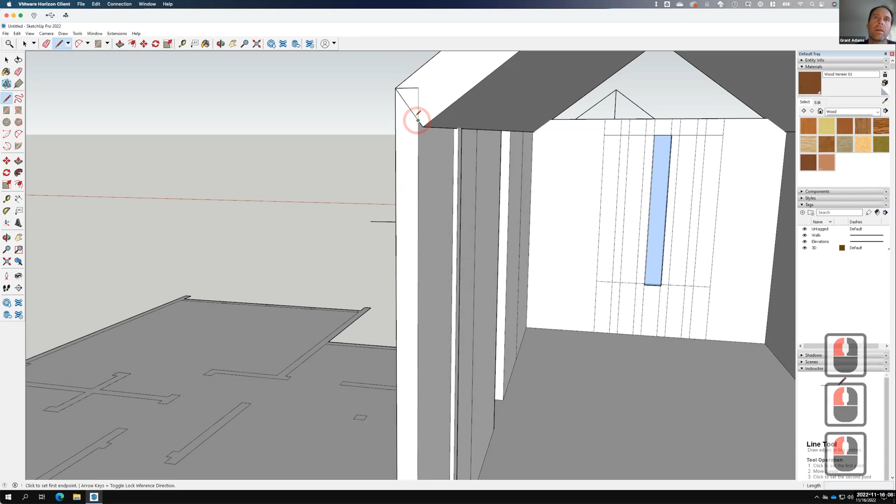It's not going to let me do it, so maybe I'd come in after the fact and draw that line in and trim it off afterward. So I could come in and delete that part of it.

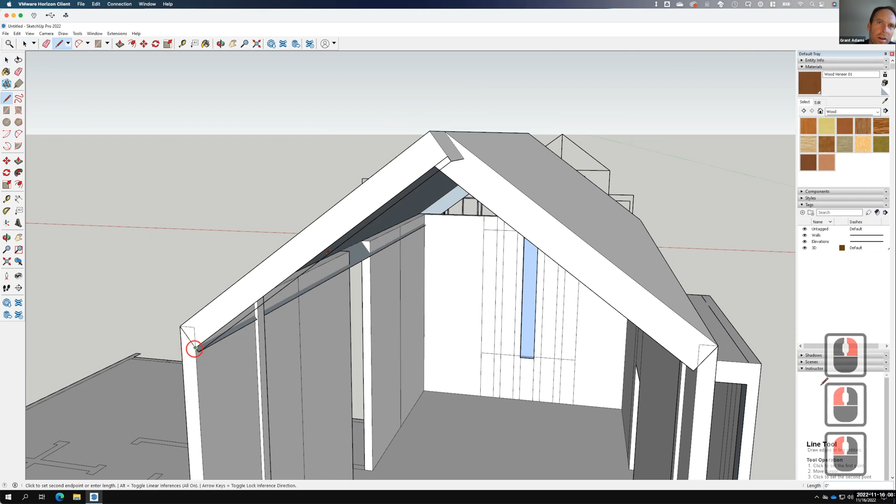We could delete this part of it, and then I could trace this along there, and then trace this back up along that side.

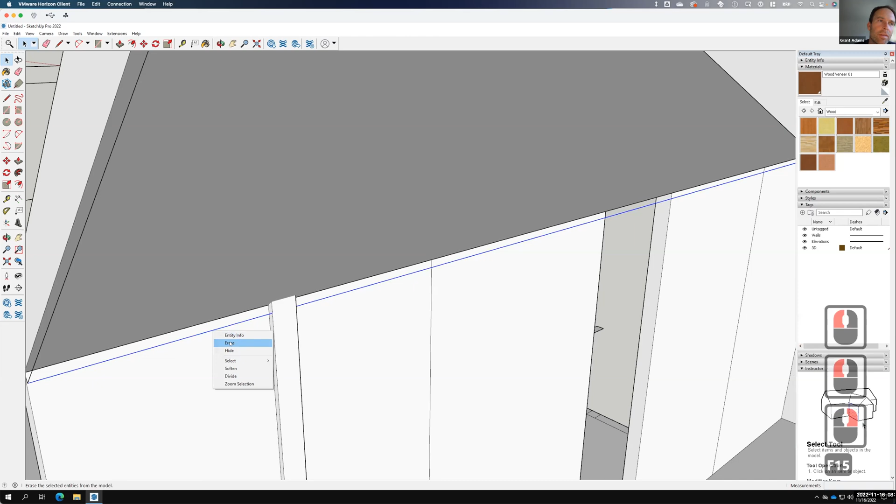And then let's flip this around to right there, and that fills in that lower part of the roof. That would let me get rid of that little extra piece and make the interior a little bit tighter as it starts to come together on that wall.

So those are just little options, little things you can work on along the way. But again, those are finer details should you want to do it. You could also very easily just fill in the top and not have any of it exposed, making it a triangle instead. Just depends on what the look is that you're going for.

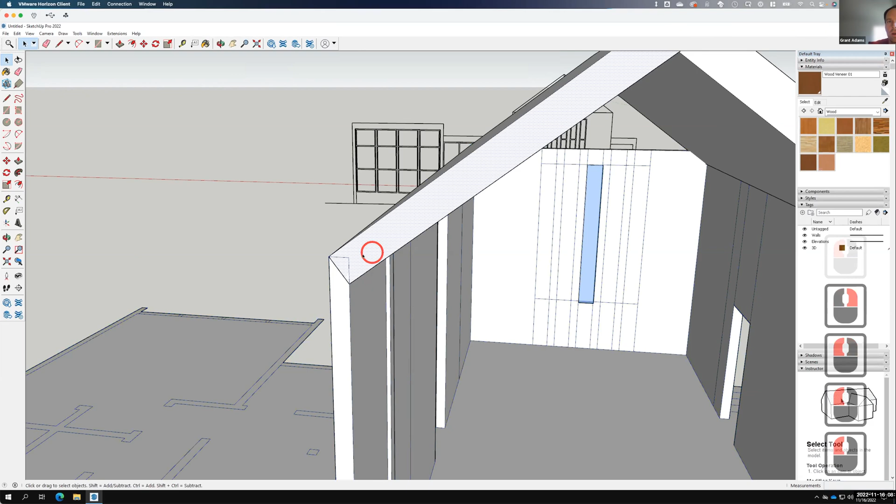So I would continue to work through and tweak that, with the roof being its own separate entity from the plan itself. All right, so these are all just options as you start to work through.

What I'd like you to start with is extruding all of the walls up. Get your AutoCAD in, extrude the walls up. I think you'll learn a lot in this process about your building. Recognize that if your building evolves, or you change your mind, or something changes — the floor plan changes, the roof plane changes, you decide you don't want a pitched roof anymore and want a flat roof — all of that is perfectly acceptable.

You can make edits at this point. So it doesn't have to be the exact same cabin that you did in 105. It can have evolution, it can change a little bit. There's absolutely nothing wrong with that.

Our goal, again, for today and for this weekend is to get as much of this done as you possibly can. I'm going to save this — actually, I should have saved it earlier just in case it crashed. So let's make sure it goes into my folder for today.

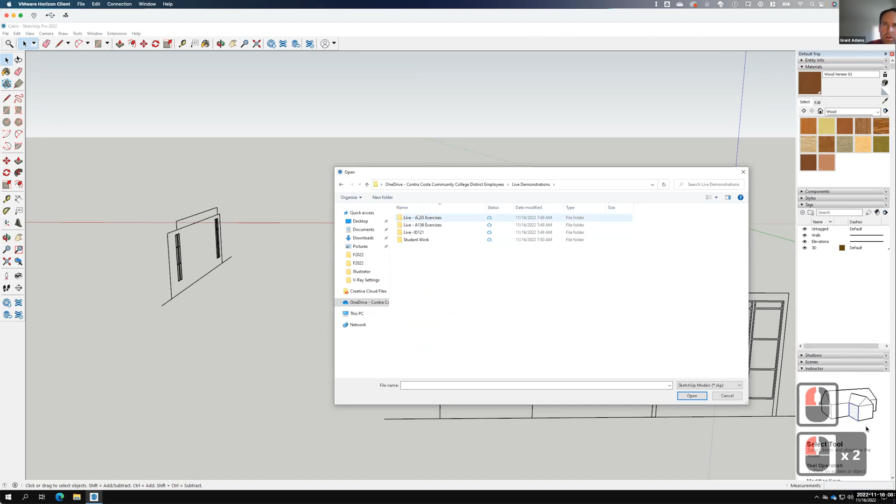I'm going to save, but before I let you go, I wanted to open up the one that I had done that I'm going to use as my example. Let me go into it — it's the one I was going to use as my example — and let's get into the perspective view so you can see it a little bit better.

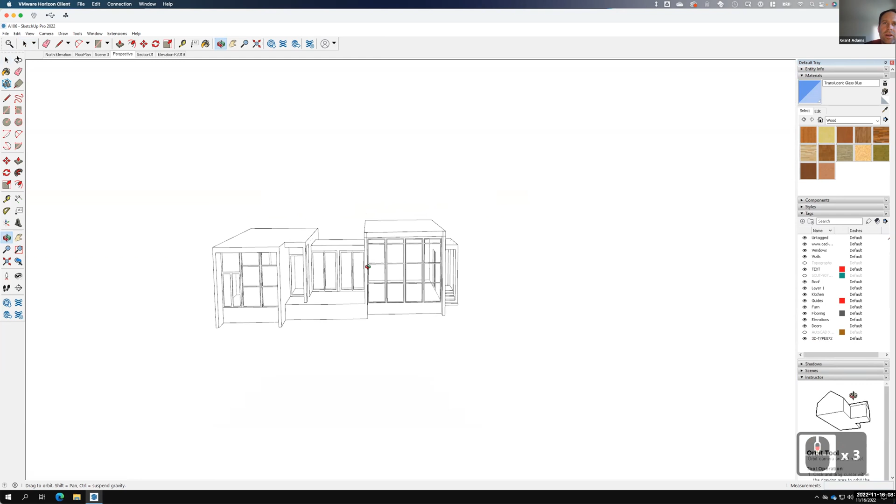I've spent a lot of time modeling that edge of the house, so when I do my elevation, it'll be that elevation. When I do my perspective, it'll be that perspective. When I do my section, I'll cut through my building and look out the other direction. You'll see that the back of the building is modeled from a massing standpoint, but it's not really detailed, and that's okay, because I'm going to concentrate on this view.

So if you run out of time, at least get one of the views really nicely done, because then you can do your elevation next Monday. Concentrate on getting one side kind of nicely resolved — hopefully it's the most beautiful side, because that's the side we're going to work with. But that'll get you a large part of the way there.